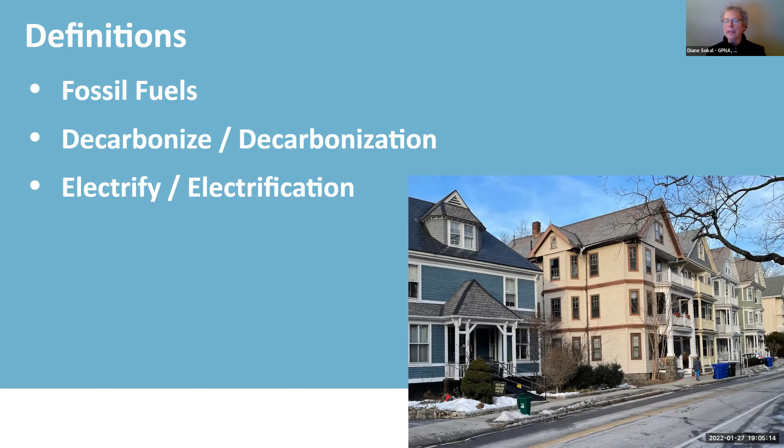Okay, now Diane's back. Oh, sorry about that. Okay. So Diane, can you start on the background slide? Oh, no, that's Wendy. Oh, hi. What? So thanks, Diane. My name's Wendy.

I live over on Edge Hill Road in the High Street Hill District. I'll be presenting a quick overview of how buildings contribute to climate change and what we can actually do about it. Next slide.

Brookline's a little higher because we're a more dense environment, slightly more urban than the average of the state. And so our transit takes up less of the total.

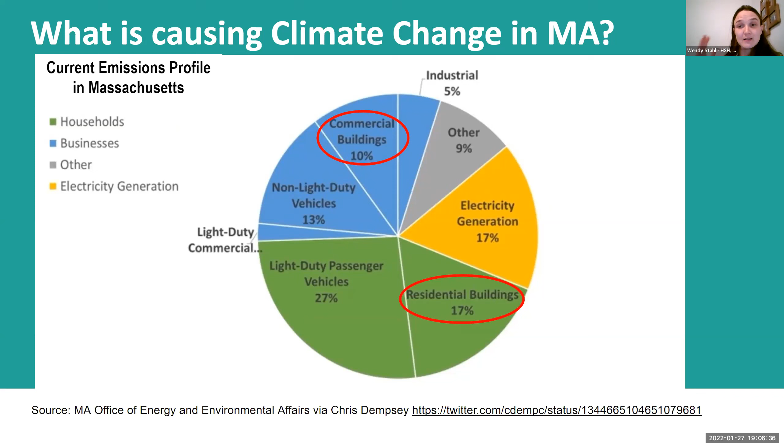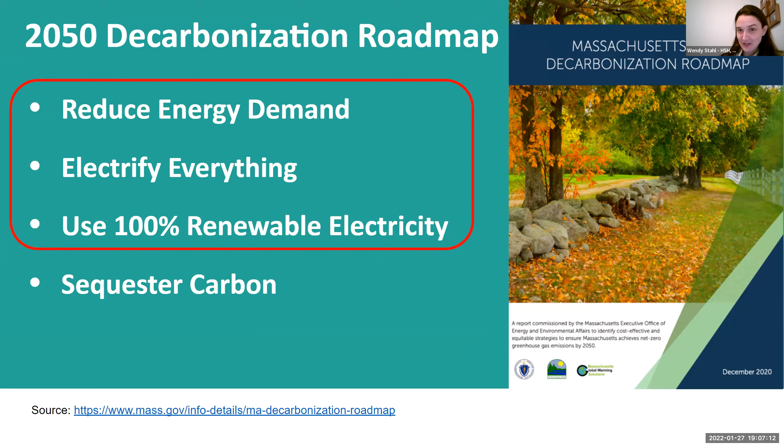Tonight, we're going to focus on the first 3: reduce energy demand, electrify everything, and use 100% renewable electricity. Whether you live in an apartment, a condo, a single family home, if you own or rent, there are different actions we can all take to follow these principles. I'm going to quickly review some simple steps you can tackle right away, and preview further steps we'll see in more detail in upcoming examples from the neighborhood. Let's start with reduce energy demand.

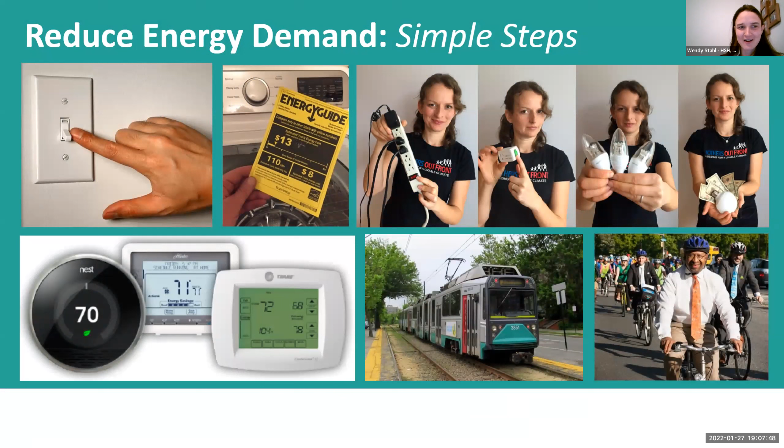You can see photos here of simple ways to reduce your energy demand. Turn off the lights when you leave the room. Use LED light bulbs. Make sure your appliances are energy efficient appliances - that's what that yellow tag is. Get a programmable or even a smart thermostat. Take public transportation, bike, walk. These are all fairly easy ways to get started with becoming more efficient.

Mass Save actually provides free resources for almost all of this. Well, not riding the T or riding a bike, but they do free home energy audits. You just need to sign up for them online, and they're for renters or condo owners or homeowners or landlords - anyone can sign up. We'll put the link in the chat, but we'll also send out all of our links in a follow-up email. However, if you didn't RSVP to this event, like if somebody sent you the link, you won't get that email from us unless you send us your email to our address, which we will also put in the chat. So basically, remember with these simple steps, you'll be using less energy in your home.

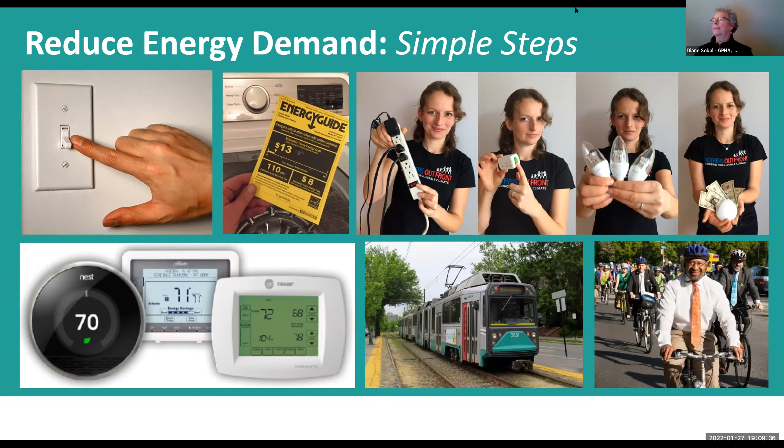Okay, I will go back to screen share. Thank you, I don't know what that was about. And so you'll end up spending less on your utility bills also. Next slide, please. I'm trying. Okay, technical glitches here. Let me know if you want somebody else or myself to share. Can you advance it yourself, Wendy, while you share? Yeah, I can. Let's just see if this works. You seeing it again? Yeah. Okay, this is the next slide.

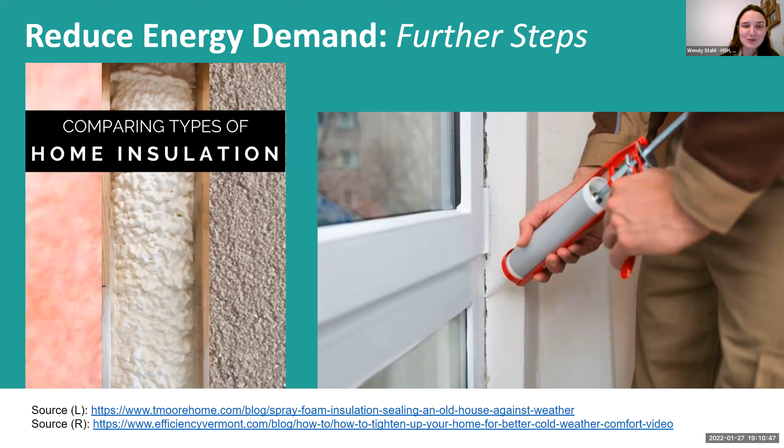The next principle we're going to talk about is using 100% renewable electricity. The simple way in Brookline to get all of your electricity from renewable sources is to opt up for 100% Brookline all green. We will put the link to this in the chat. All you need to sign up is an old electric bill that has your account number on it. Depending on how much electricity you use each month, every house uses a different amount, it may be $5 or $15 more than the default rate in the town program. The town's default rate provides 50% renewable electricity, so opting up to 100 really isn't too much more expensive.

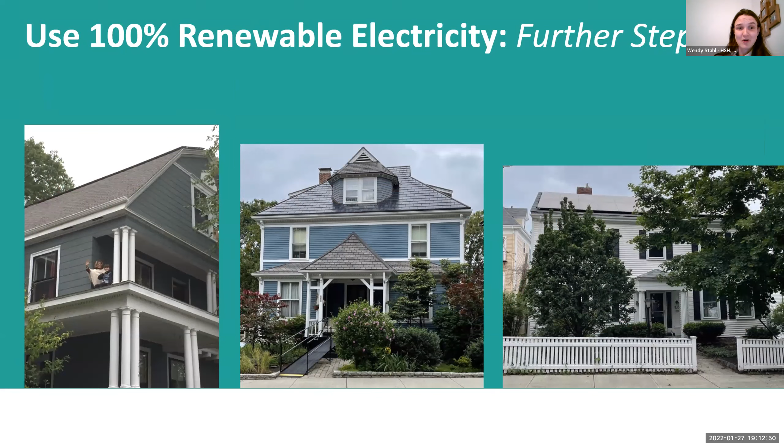Essentially, wherever we're using fossil fuels in our home appliances and equipment, we need to transition to all electric instead. This means our stoves, our cars, heaters, our water heaters, our clothes dryers, everything. You need to be able to disconnect the gas line to your home eventually, or the oil that's delivered to you. Taking the steps to electrify our appliances and heating systems can be bigger, more complicated, and more expensive changes that do require some planning ahead, so you're not stuck making a last minute decision when your appliance suddenly reaches the end of its life. But there are Mass Save rebates for these as well.

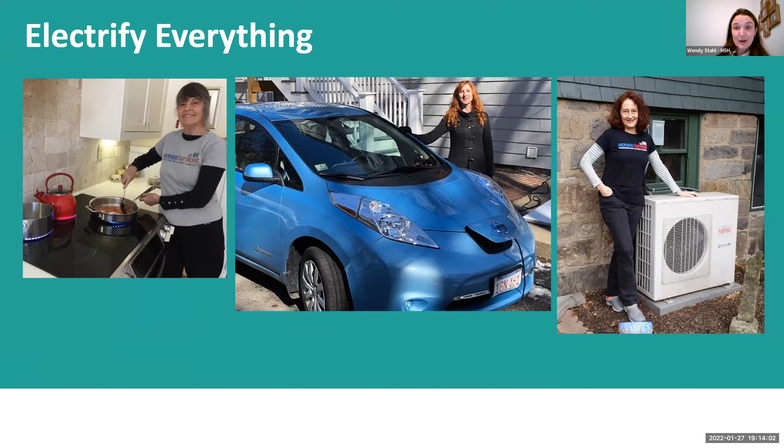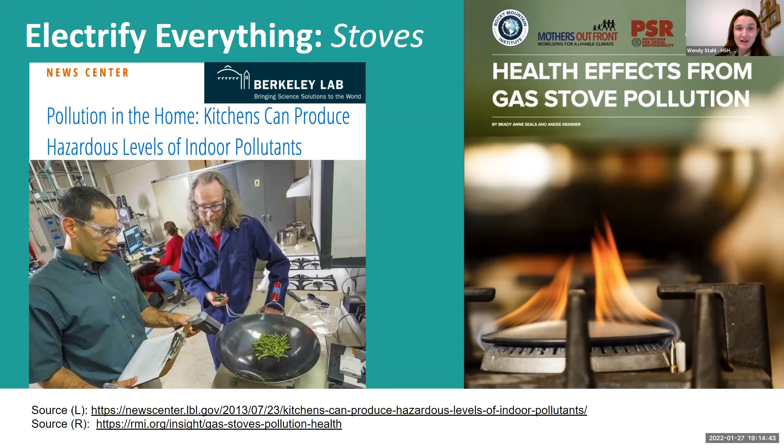Next, I want to highlight one opportunity for electrification that many of you might not be familiar with: our kitchen stoves. A lot of us here have gas stoves in our homes. Traditionally, it's been thought of as the best method of cooking. Now, we all know that burning gas harms our climate, but did you know there's more and more data coming out that gas stoves in our homes create air pollution inside our homes, which leads directly to increased rates of respiratory diseases like asthma. It's been studied, it's a fact.

An excellent alternative to gas stoves are electric induction stoves. They're the modern replacement for gas stoves. Now you see this lovely picture on the right. These electric induction stoves are not your grandma's electric stove, and they're not the same as typical glass top electric radiant stoves. Induction cooking actually uses magnetic technology to heat the pan without heating up the whole cooking surface. Notice the cat there? That little kitty cat's perfectly safe. Induction cooking is fast, it's more responsive than gas, it's safe, and it's energy efficient.

However, you or your landlord may not be ready to install a new electric induction stove to replace your gas stove. But the good news is that there are other simple options. Next slide.

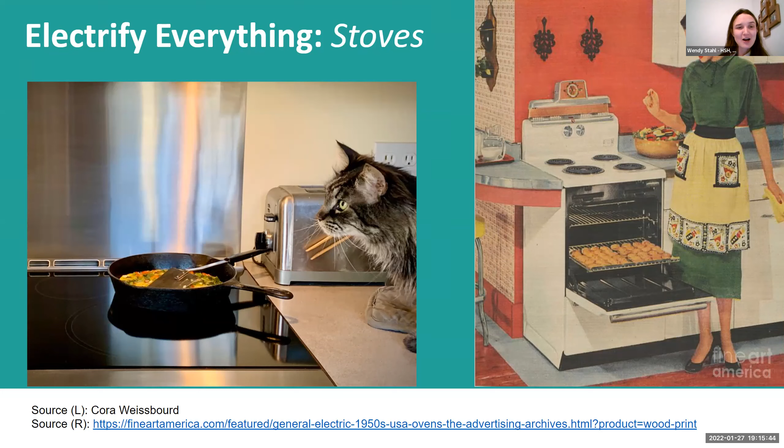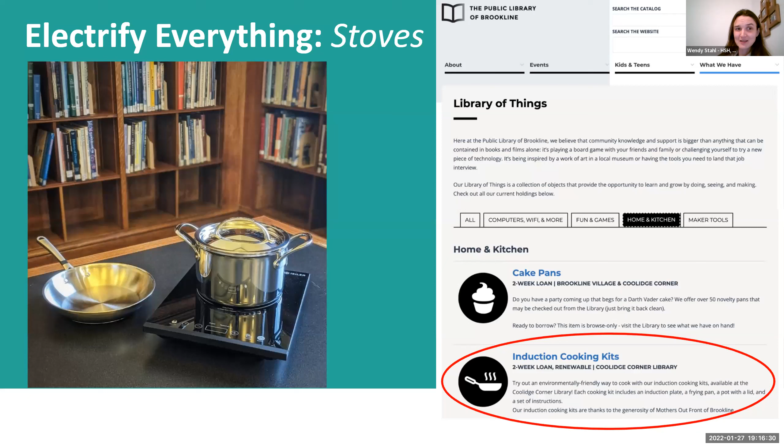Like our library lending program. Mothers Out Front in Brookline has made it super easy for you to try out electric induction cooking. You can borrow a portable kit from the Coolidge Corner Library as part of the Library of Things. We have set up 4 kits that you can reserve either in person or on the library website. The link is being put in the chat. Each kit contains a portable induction plate, a frying pan, a covered pot, and instructions, just as you see in that photo. Many people have even told us that after trying out the library kit, they decided to buy an inexpensive portable unit, and that's all they need for cooking. They still have their gas stove, but they don't really use it anymore.

So another big part of your home that will need electrifying is your heating system. We're going to show 3 examples of local homes that have done this transition, but before that, we wanted to give a quick explanation of all electric heat pumps.

Heat pumps are able to heat and cool buildings in a single system powered by electricity. In the winter, they draw excess heat from the outside air, or the ground if it's a ground source heat pump, and push it into your house. In the summer, it works in reverse and draws the heat out of your house like a traditional air conditioner, but it's more efficient. Heat pumps are more efficient than gas-fired or oil-fired heating systems, and they are effective in cold climates like ours. Heat pumps generally require some equipment outside the home and some inside the home. You can see in this image, the red is inside the home, the blue is outside the home. And there are a few different ways to set them up, as you will see momentarily.

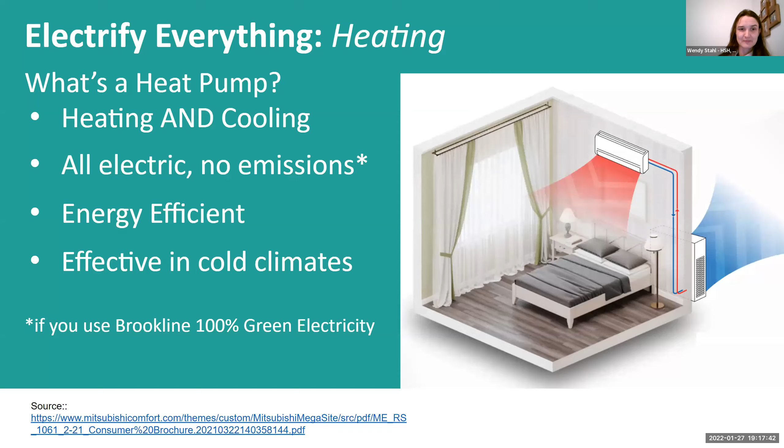So we're about to show you 3 different ways to install heat pump systems with examples from the neighborhood. But first, we're going to switch who's sharing the screen. And in a moment, when we get the slides up again, we'll start with Neil Wishinsky. So hold on, I'm going to mute myself.

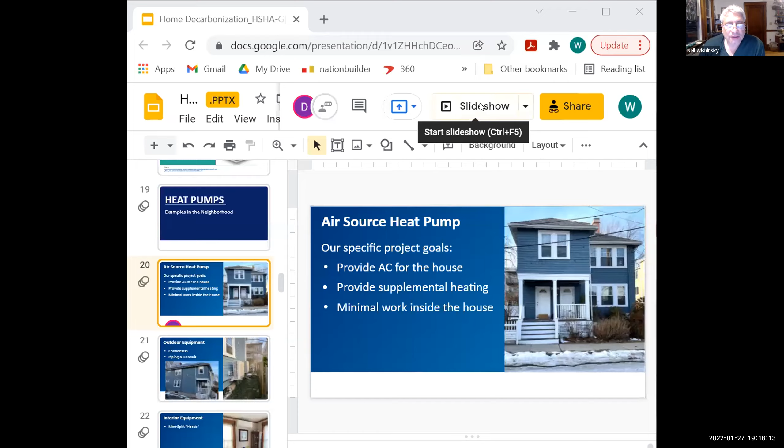So this is our house, and we live in a standard 2-decker. This is across the street from Robinson Playground on Henry Street. And we put heat pumps into our house back in 2014, so we've had it now for 8 years.

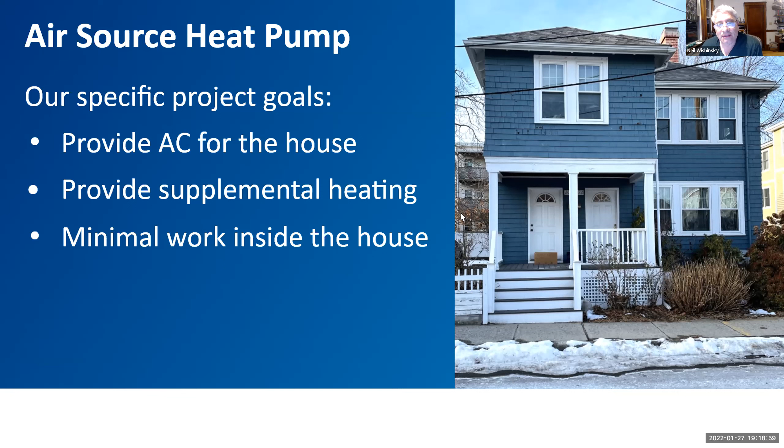When we were doing this, our primary goal was actually to provide central air conditioning, and the heating was a bonus. As you'll see, if you go to the next slide, you'll see the units that were put in.

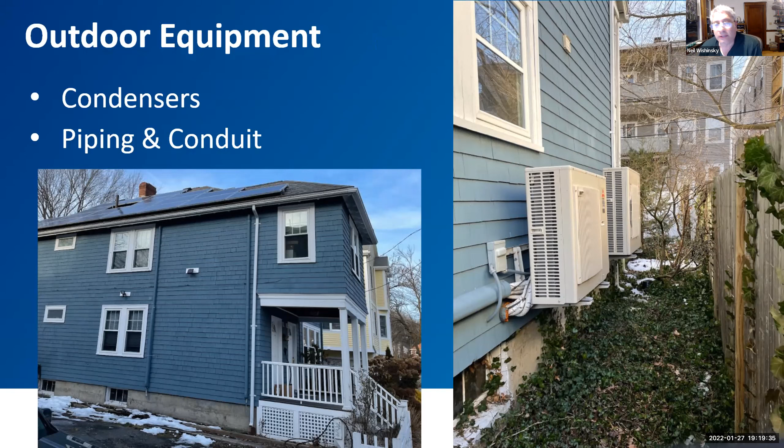We still have our steam and hot water heat. We have steam heat on the bottom floor and hot water heat on the top floor, and we're still using that. I kind of like the radiant heat as opposed to the heat coming from the units. That's a personal choice.

Though when the furnaces go, I know that we have these units that can supply the heat, so we don't have to replace them, and they work very well. I have found if we're running them in summer, it's a heck of a lot cheaper than window units. And they're very, very comfortable.

You can control the temperature in each room. Each room is in effect a zone. They can be internet enabled, though these are not. Though actually we can retrofit them for the internet for maybe $100 to $150 per unit, so it's not that expensive even for a retrofit.

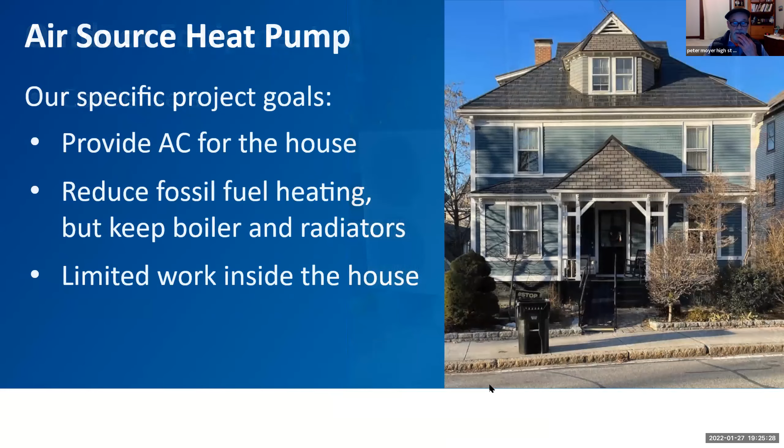So let me quickly tell you a little bit about how this thing works. Can you go ahead, Diane, to the next few, to the heads? Keep going, start right here.

I got a lot of warnings actually from various vendors that in the wintertime we wouldn't be able to heat adequately, which I think is wrong. I think you could heat, and I heat adequately, with just the heat pumps, and I plan to remove the gas system at some point. So I'm really very happy with it.

The financial part of it I'm still working out. I heard Neil's comment, I hope I get there, but I'm still working out. I made some mistakes in terms of choosing vendors. I also have 100% renewable energy, but I chose Clean Choice, which was very expensive, and I'm now having to backtrack, which I'm doing. So I'm going to get my electricity from the town, from Direct, I think it's called Brookline Direct.

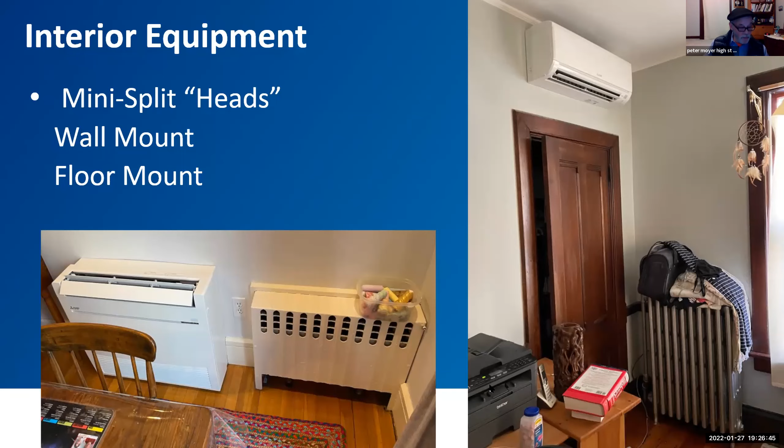So my comment on this is I liked the heat pumps, and I'm glad I did it. My big drawback was the initial capital expenditures, around 50 grand for me. You're going to see all the work that's going on inside our house. I think if they were going to use these in a widespread manner, we have to think of ways to subsidize it. I happen to have been able to afford it, although I stopped at 50,000. I didn't do the 3rd floor because I was running out of money. So I think we have to think about how we're going to finance these.

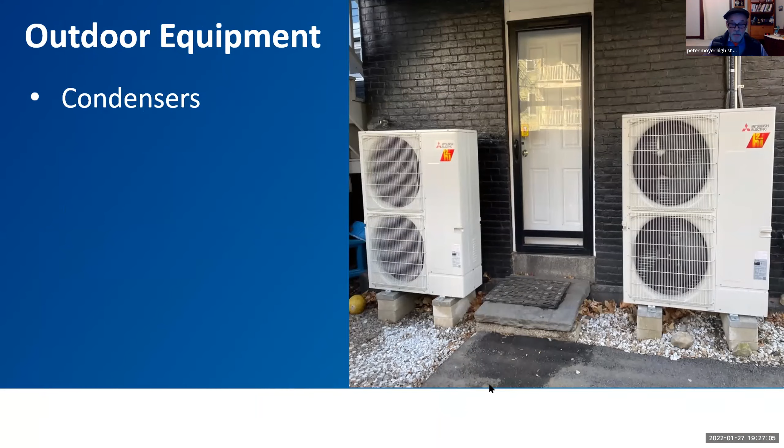We saw that picture, so that's the condensers in the back of the house. The condensers are hooked in to these 2 branch boxes, and then they in turn go to 8 different heads throughout the house. The whole thing was done, this is on your left, you'll see an example of this.

The whole thing was done internally. I actually talked about doing it externally, but we're in the historic district. I knew it wouldn't work, so we didn't waste much time on it. And they were honest and said it's not going to work. We couldn't do what Neil did in terms of making would-be downspouts on the outside of the house. They weren't having it, so we did it internally.

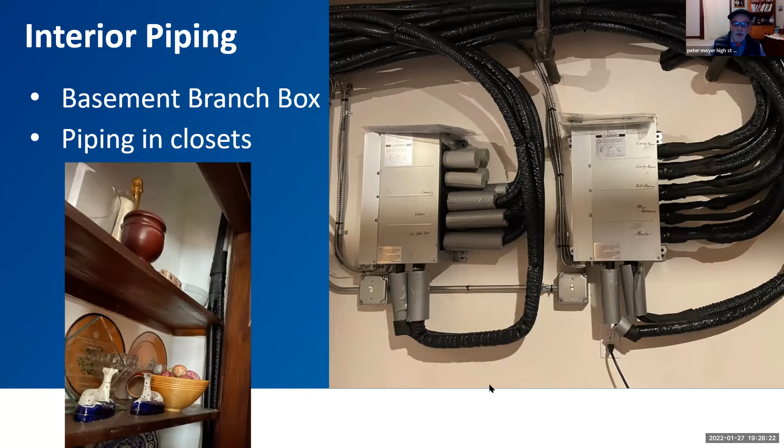The Historic Commission said no, just for cosmetic reasons. So this was the alternative. And now I think there are a number of sun slates, I just looked at this afternoon. A number of different companies make them.

Ours has worked fine. It's got a 20-year guarantee for weatherization, 20-year guarantee for energy production. It has withstood - if you remember, maybe 5-7 years ago we had a significant hailstorm - nothing cracked. So I'm happy with them.

And they produce energy. I don't have exact readings. I'd like to be able to, but I have an inverter in the basement, which converts it from DC to AC, and it also gives me a readout of the energy.

So I'm happy with all 3 of these, although my worry on both of these heat pumps, as well as the roof, is I think we really need advisors, much like you all are doing. I'm very appreciative to Dean and Diane and Wendy for organizing this, because I think we need much more citizenry information and intelligence gathering. Having talked with Diane the last few days, it's going to save me a lot of money switching away from Clean Choice, for instance.

So I do think we need somebody to convene. I don't see much motion in the town. I see all of us are interested in it, but I think if we're really going to move ahead and be someplace by 2030, we really need a central organization which would offer information, advice, etc., much like Mass Save does, but in a different way, for a different purpose. So that's me.

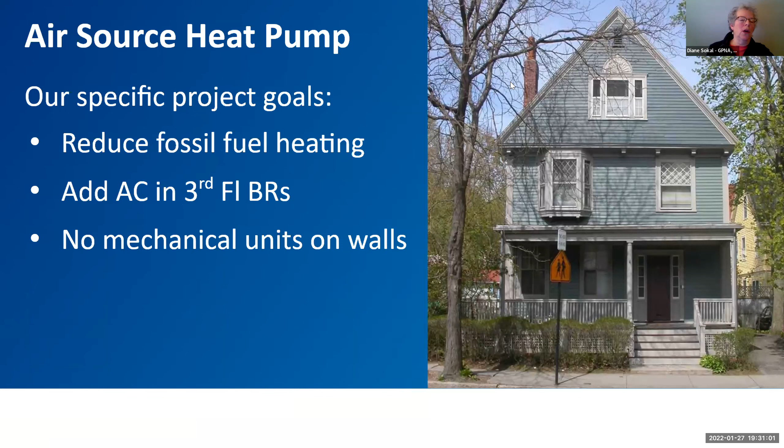In our house, we didn't want those typical wall units on our walls because up on the third floor, most of the walls are actually sloped ceilings. There wasn't a lot of vertical wall space. So we put in a different sort of system - it's called a ducted mini split.

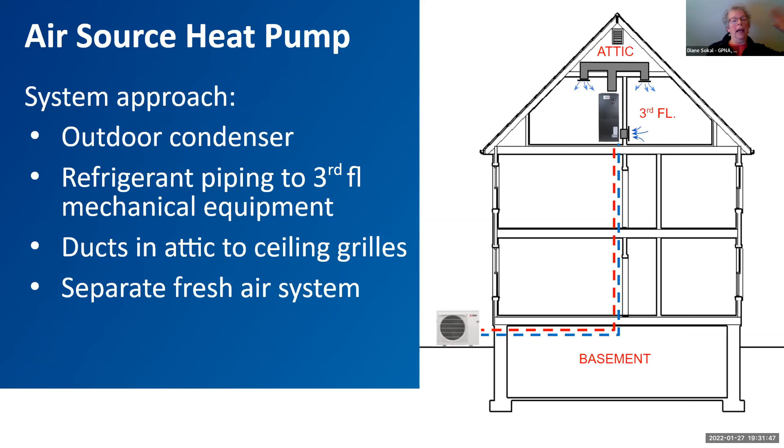These same refrigerant lines, those black pipes that you saw in Peter's photos, connect the condenser outside to this piece of equipment on the third floor. From that equipment, there's ductwork that goes into the attic, and from the ductwork, the air comes down into the rooms on the third floor. There's also a large return air grill.

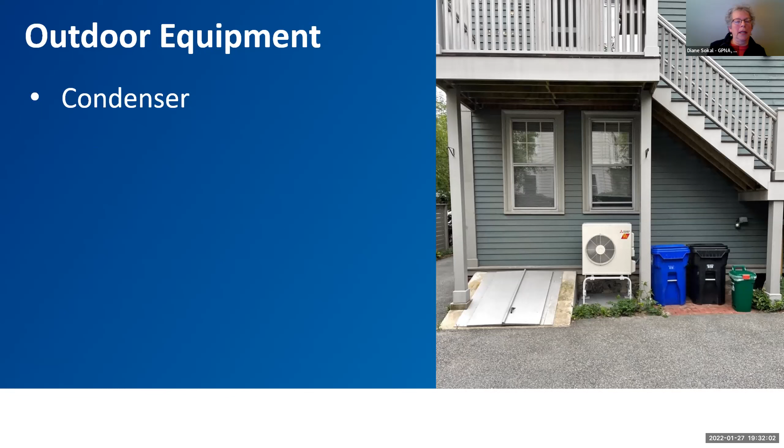Here's a picture of the condenser. It sits on the edge of our driveway, not a big visual impact, and it's actually very quiet too. So this is a little tricky.

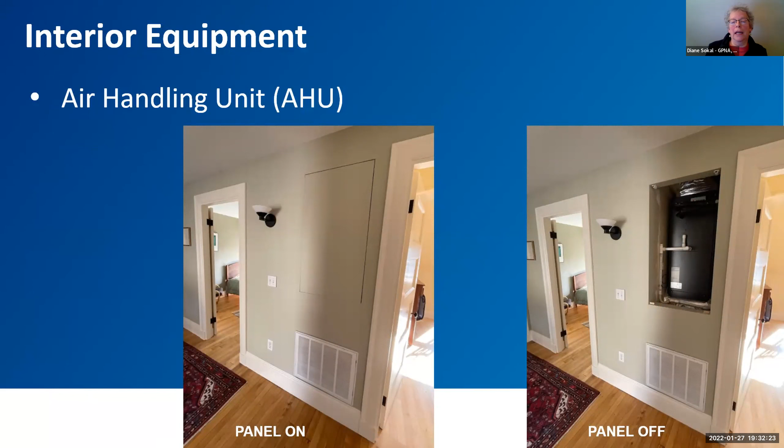Inside the house, this is the third floor hallway. You can see on the left, there's a little line in the wall - that's a panel, and when you take off the panel, you see the mechanical equipment, the air handling unit behind that. So really not a big visual impact in the house. And really what we see on the third floor is just these little square grills in the ceiling.

The ceiling grills - the heating and cooling are very quiet, gentle and uniform. I was happy to get rid of our dusty old radiators because we have better floor space to put our furniture. This system is still called a heat pump and mini splits, but it's called a ducted mini split heat system. We were able to do that because we have some attic space above the third floor where we could put the ducts.

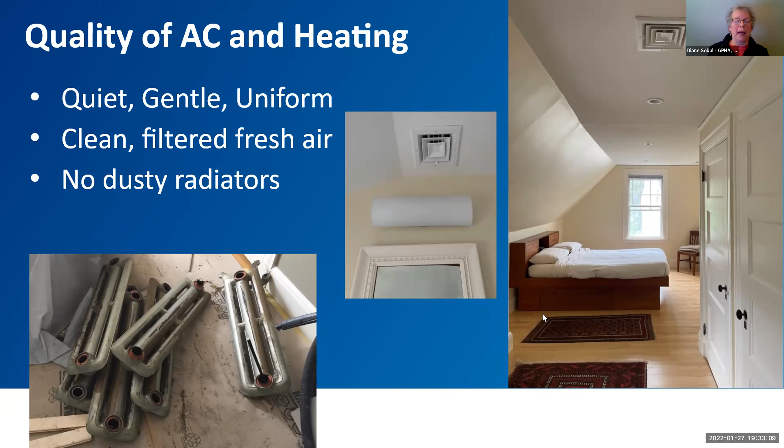When we go ahead and do our second floor, that won't be possible - we'll have to do a different sort of system. So next slide, I'm going to talk a little bit about planning ahead for larger scale projects. I'm an architect, as Dean said, so planning is just sort of part of my nature, what I do.

So maybe you or your landlord are interested in taking further actions towards decarbonization. I think it can be helpful to really think ahead and think through some of the steps so you're prepared if your heating system goes out. Again, I like to plan using these same three principles: reduce energy demand, electrify everything, and use 100% renewable electricity.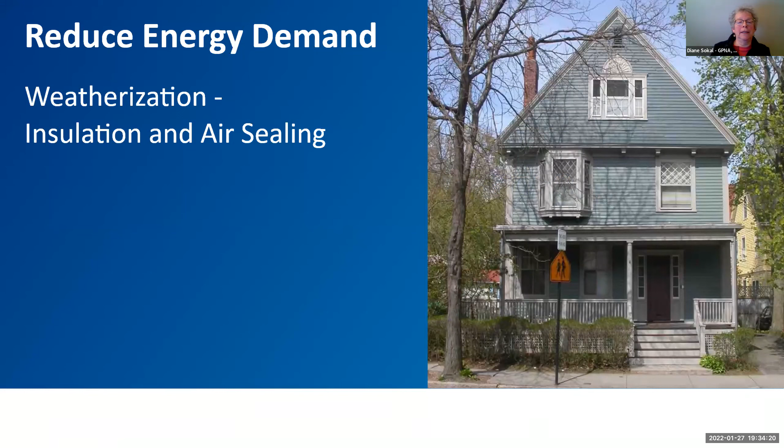Again, if we peel off the front layer of the house, we can see a section through the house. With the Mass Save program, we had contractors install blown-in cellulose insulation from the exterior of the house. Mass Save has special programs for 2 to 4 unit buildings, and as a 2-family house, we received 100% incentives from Mass Save, so we had this work done for 0 money on our part. In the section drawing, you can see in red the areas that were insulated by Mass Save. They couldn't address the entire house, but this was a big start in getting our house insulated.

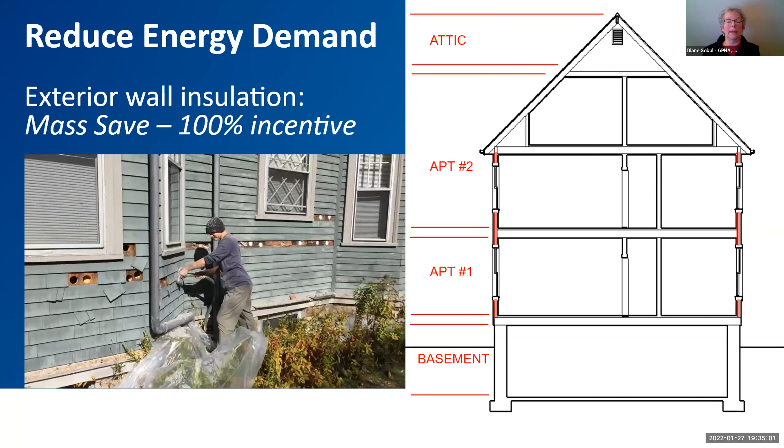So when we took on a bigger construction project last year, we took care of the drainage problem that we had in the basement, and the contractors added spray foam insulation to the inside of our basement stone foundation walls. You can see the before and after photos. Now you can see more red on this section drawing: the basement walls, the slab, which is a long story, and the connection between the foundation walls and the exterior walls.

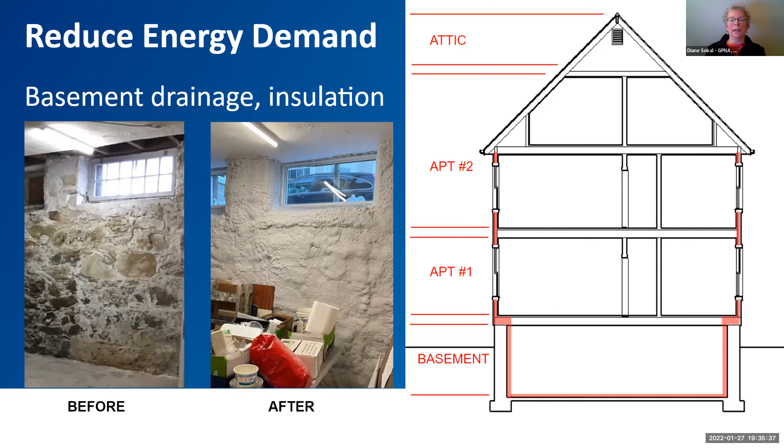Along with the basement, the contractors insulated the trickier areas up on the 3rd floor under the sloped roof, in the eaves and the attic. The goal here was to connect all of these red shaded areas, so the house is really wrapped with a more complete layer of insulation, and also that all of these air leaks would be blocked. This really helped make our house stay warm in the winter and much cooler in the summer. And because we live on a busy street, Cypress Street, it has also made the house a lot quieter.

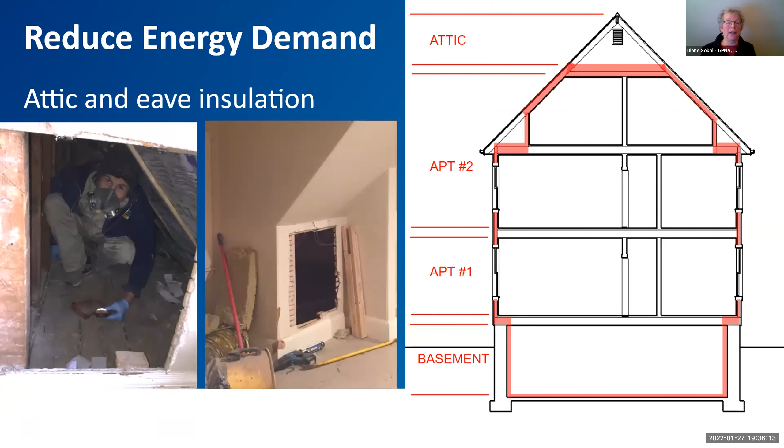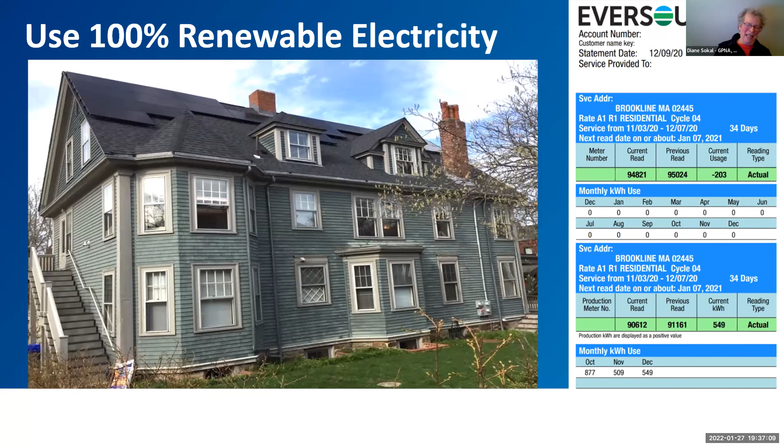Right now, we're building up a credit on our electricity bill for when we complete the transition off of fossil fuels to be a fully electric house. In December, we did pay $75 for electricity, but that came out of our credit, since December was a low solar production and high heat pump use month.

So electrifying everything can be a challenging step in an older home, getting rid of all the gas piping and all the gas connections through the house. This is where planning can really help. So we looked at all of the equipment and the appliances in our house that were fueled by gas, oil, propane, or gasoline.

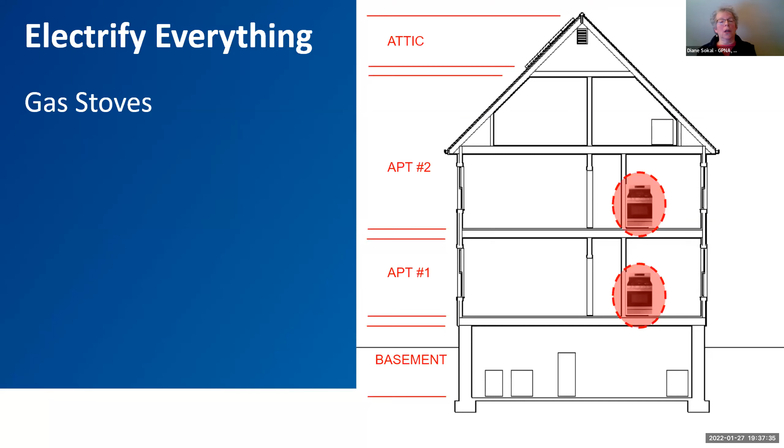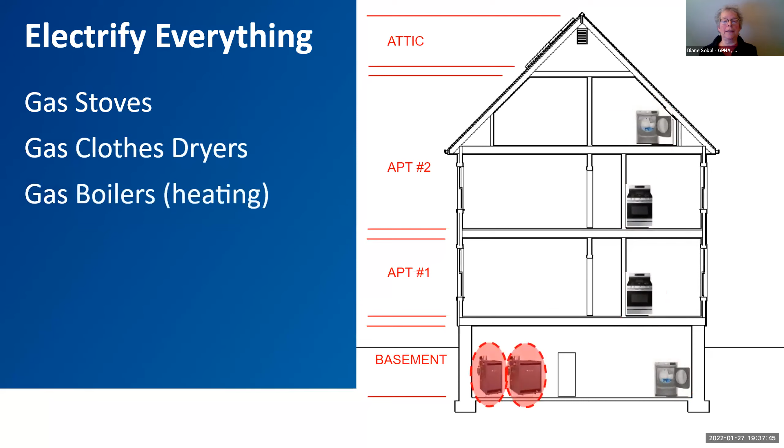We had 2 gas stoves, 1 in each of the apartments. We had 2 gas clothes dryers, 1 in the basement for the 1st floor apartment and 1 on the 3rd floor for our apartment. 2 gas-fired boilers for the heating systems with old-fashioned radiators, 1 boiler for the 1st floor apartment and a larger one for our apartment. Then 1 gas hot water heater, a separate unit providing hot water for showers and dishwashing, 1 large water heater for the whole house. And we own 1 car that runs on gasoline.

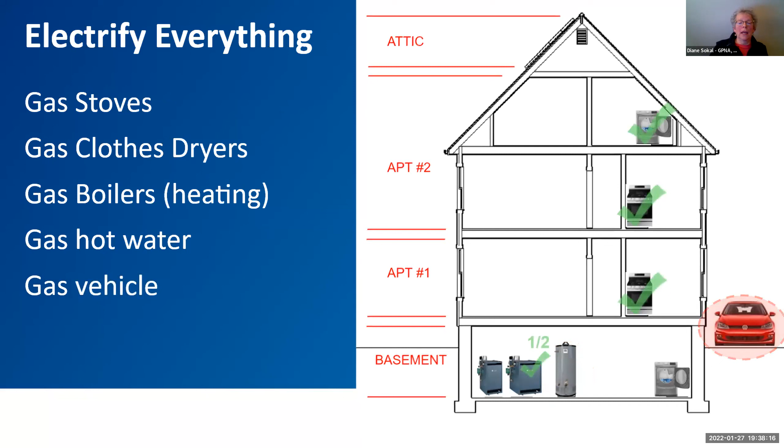So eventually all of these items will need to be transitioned from fossil fuels to electricity. With the work we did last year, we switched out both of the gas stoves to electric induction, and we changed the upstairs dryer to electric. It was a gas dryer, changed it to electric, but we also hang our laundry to dry.

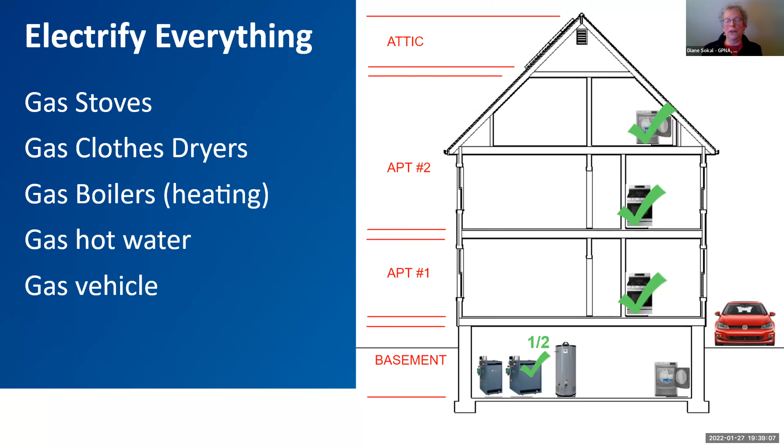We installed the heat pumps for the 3rd floor, the upper level of our apartment. By removing the radiators on that floor, we've really cut down the use of our boiler. It's really only heating the 2nd floor now. So we hope to install heat pumps on the 2nd floor next, which would take care of the rest of the heating system. We've made good progress, but there's still a lot more electrification work to do until we're a fully decarbonized home. Happy to be on this decarbonization path with all of you neighbors and colleagues. Now I'll hand the presentation back to Deane.

Wow, thank you so much. Thank you, Diane, Peter, and Neil for sharing with all of us the great work you've been doing. It's very impressive and educational for all of us, I think. And I think the rest of us may be wondering how much all of this will cost. There's one easy answer, but it's a frustrating answer: it depends. Every home is different, every heat pump system is different. However, we will try to give you a little bit of information.

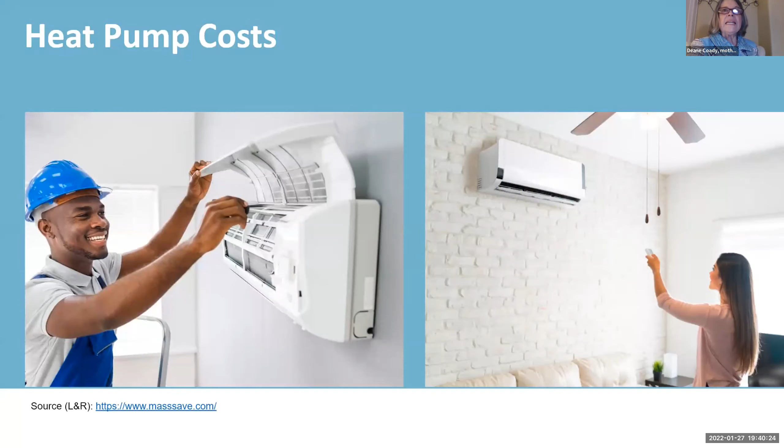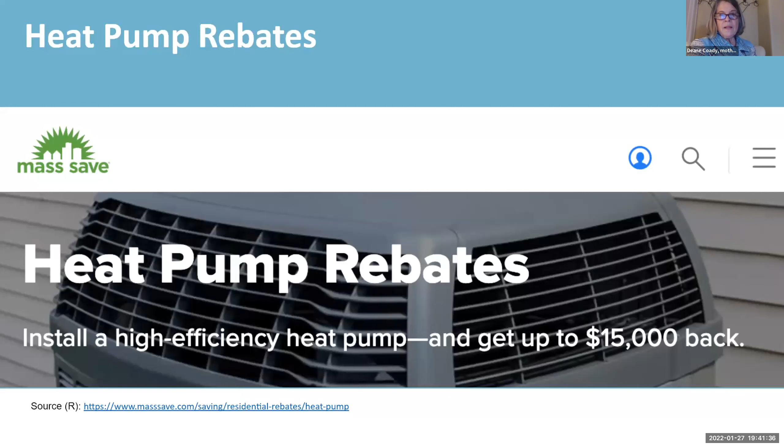Keep in mind that there are rebates and incentives through the Mass Save program. Hopefully at the end of January or early into next month, we'll be hearing about the new round of 2022 Mass Save rebates for heat pumps. The Mass Save website currently says you can get up to $15,000 back, but this would likely be for a whole house system replacing oil heat with electric. So somebody like me, going from natural gas to electric, I couldn't use this at all. Mass Save also offers interest-free loans, and a lot of the weatherization work, such as insulation, is free or highly discounted. So it's definitely worth starting with Mass Save. And if the Commonwealth is serious about retrofitting 1 million homes by 2030, we'll need to see much more serious programs offering financial help as well as technical help.